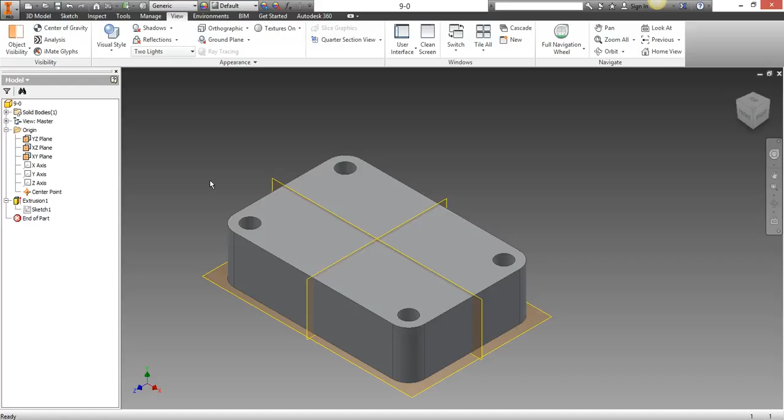To create this shape, go to 3D model and click Start 2D Sketch, then click on the XY plane. I'll show you guys how this sketch looked like before I actually created it. You can either draw this way by doing the top view, or you can hit home and draw your shape in this manner too.

You can see my dimensions: overall width of 2, length of 3. I dimensioned from the center point over 1.5. Same thing from the edge here is going to be 1.

The circles I drew after I did my fillets. I did all my fillets first and made those 0.25. After making all the fillets, I had a center point I could use to select for my circles, and all the circles are 0.25.

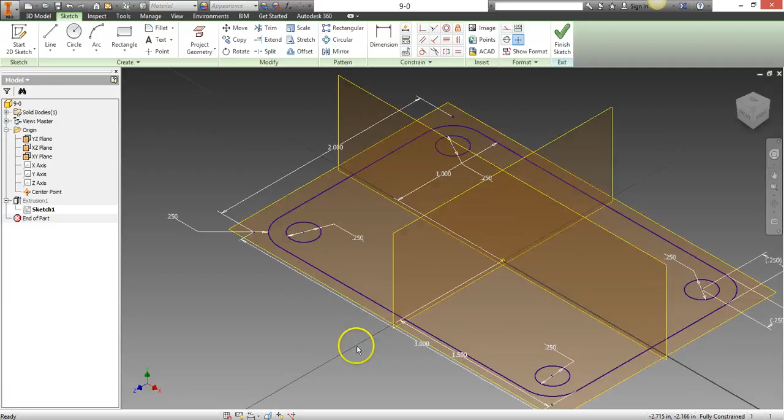Hopefully you guys understand that the distance from the center point to the edge would be 0.25 as well, same thing here. Go ahead and get this drawn and dimensioned, then hit finish. Once you have the shape drawn, hit finish sketch, then you'll be able to extrude.

I'm just going to double click so you can see the extrusion. I went in the first direction and changed that offset distance from my extent up to 0.75, and then I was able to get this shape.

Once you have this shape, we can go ahead and start creating our next shape, which is a little bit different than what we've done. We're first going to go to the View tab and change our visual style to wireframe, which we've done before.

Then what we're going to do is start creating another plane. Right now we've got 3 planes, and we're just going to add a diagonal plane going through this drawing so we can create a sketch on that. I'm going to go back to 3D model and select plane, or I could have right-clicked and selected plane as well.

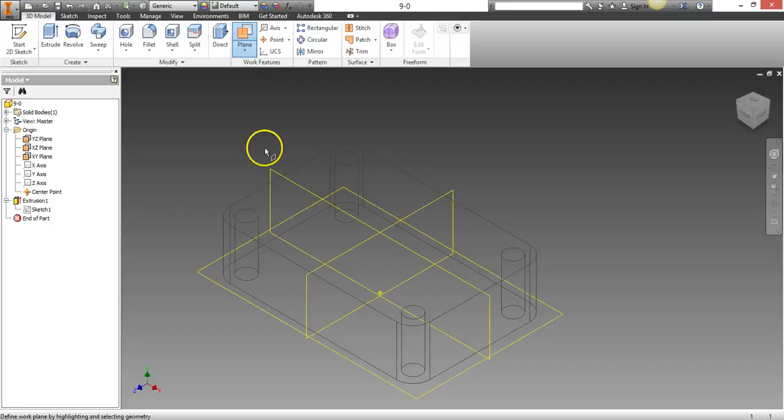I'm not just going to start picking points. What I'm going to do is select over here, although I could do the same thing on the drawing itself. But because it's really expecting me to select some geometry to create a plane from, I'm going to do the XY plane and the Y-axis.

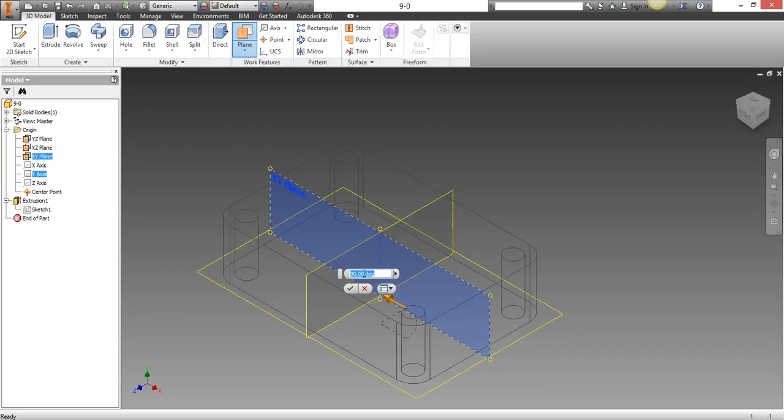Once I do that, I can then type in an angle degree that I want to create this plane about, so I'm going to do 30 degrees. Hit the check mark, and we now have a plane that's going diagonally through our drawing.

Once I have the plane drawn, I can go ahead and do Start 2D Sketch, and can either select the plane here or select the work plane here, and it's going to rotate it for me.

I actually want to go back to the home view, so I'm just going to hit the home button. Then what I'm going to do is something called Project Geometry. I'm going to make sure I'm in the Sketch tab, and then click on Project Geometry.

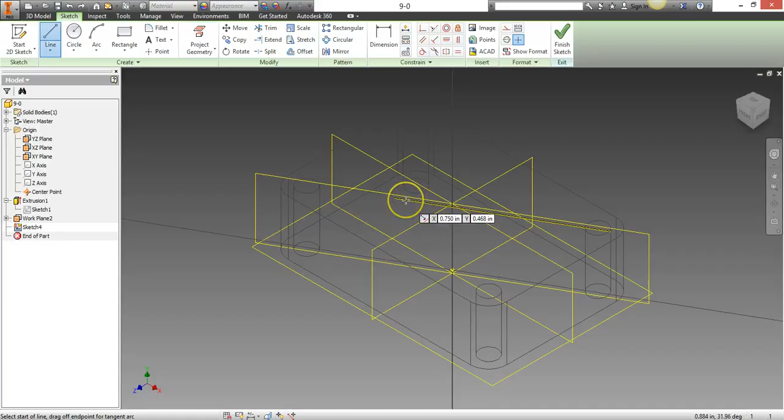I'm going to click the back edge of this shape, and it's actually going to project a line onto this angled surface. Now I'm going to use this line that we just projected and pick a point. Don't pick the end point, or else that's going to constrain it, just pick a point on this line, and that's going to allow us to have a projection point, so we know where this line is actually creating at. It's being projected from this back edge, and it's on the correct plane.

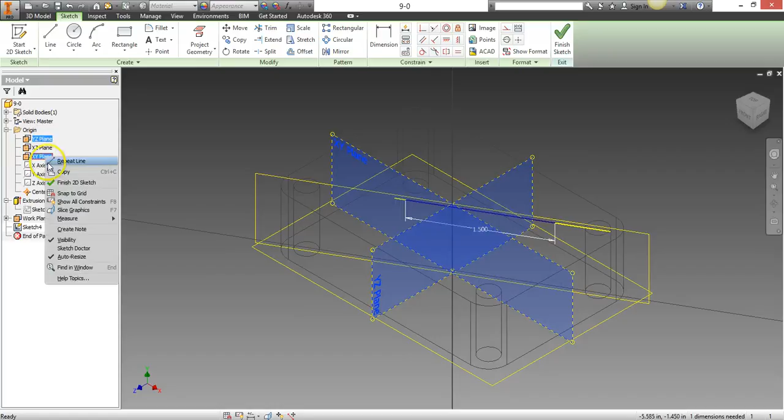So I'm going to make this 1.5. It's kind of confusing with all the planes that we have right now, so why don't we go ahead and hide the XY plane and the YZ plane. I'm just going to Control and select both of those at once and turn off the visibility. That's going to allow us to see this a little bit easier, and we can always turn that back on.

So before you move any further, it's really important to center this line. What I'm going to do is click Dimension and select the endpoint here and the origin here, and then I'm just going to type in 0.75, which is half of 1.5.

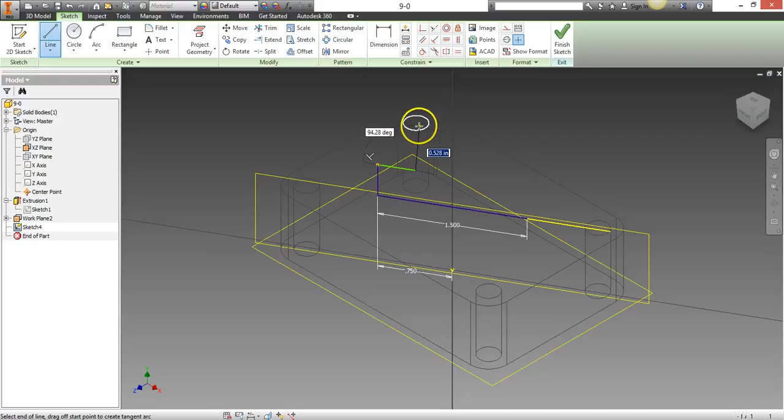Now what I'm going to do is go ahead and create a shape. It doesn't really matter the exact dimensions, but very important, you can do it now, it's saying it's 0 degrees. Make sure that all of your lines are either at 0 or 90 degrees. Very, very important that these are straight.

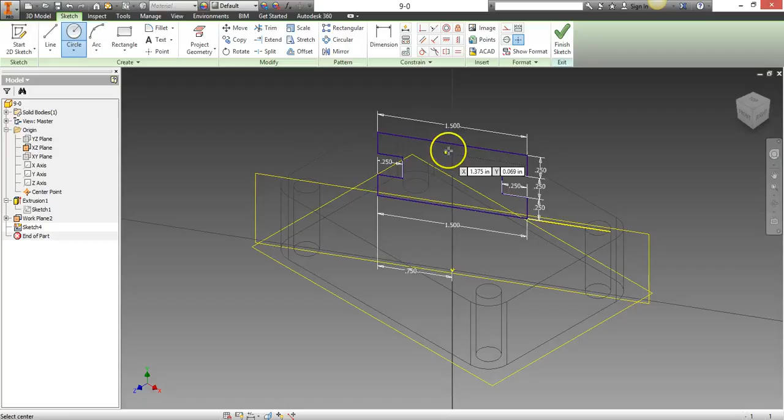I'm going to select circle, make sure it's a center point circle. Actually, let's try to do arc. Instead of 3-point arc, let's do center point arc, and I'm going to select the center, then select an edge, and then I can just move my cursor and select this opposite edge. Now it's going to give me an arc, so there's no trimming involved.

Now I'm going to do a circle. I'll make this circle have a diameter of 0.75, and then I'll need to delete this line right here. I can hit finish sketch. I know that it's not constrained anymore, it's because I deleted that line.

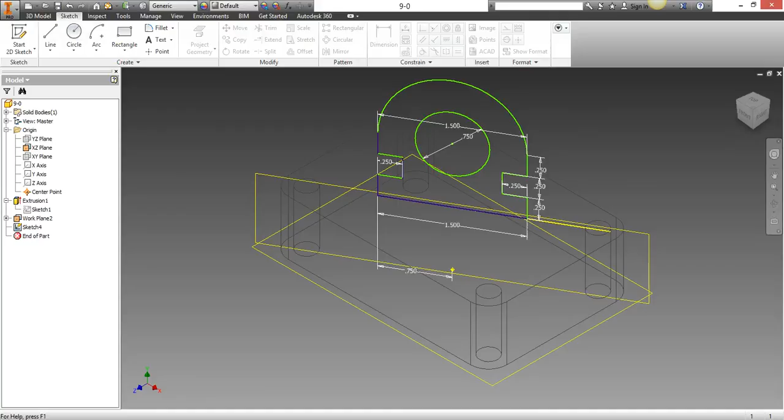But now what I can do after I hit finish the sketch is go ahead and extrude. I'm going to extrude this distance 1, but I'm going to do a symmetrical, so it's extruding 0.5 forward and back. Hit OK. And now we can go ahead and let's turn on these planes again, just in case we need those a little bit later on.

I'm going to turn on the visibility, and I'm going to switch the view now to shaded with edges so you guys can see how this shape really looks. So pretty cool what you guys just did and how we created this shape at an angle because of this work plane that we used.

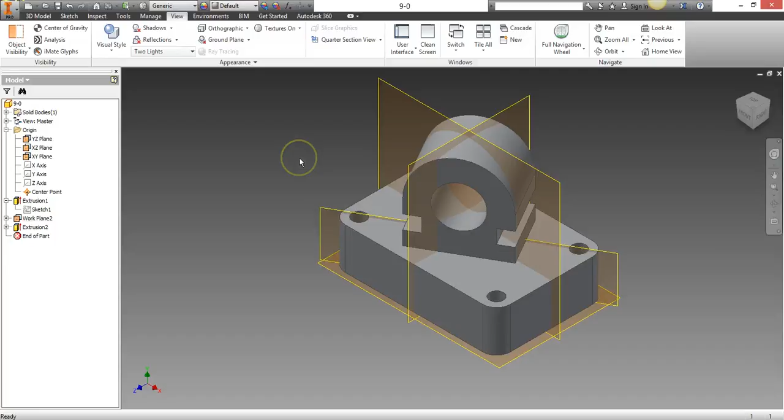So we need to create one more work plane. Just go to 3D model and click on plane, or again right click, and we need to select the top of this view. I'm going to click on this, and don't be alarmed if you see a shape like this. Just make sure that you select the top plane, then click on that plane and just drag up, and then you can let go of your mouse and type in a value.

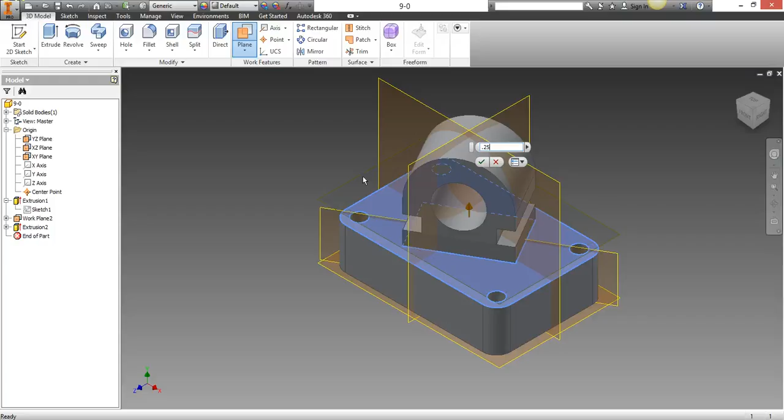0.25. Actually, let's make this a little bit easier for us. We'll do it 0.75.

You hit the check mark, and now we offset up from this plane by 0.75. So now it's actually going to be going through this circle. So I'll start a sketch and click on this plane, or select work plane.

Now I'm going to create a circle, using the center point right here, and I'm going to make this a fairly small circle, 0.25.

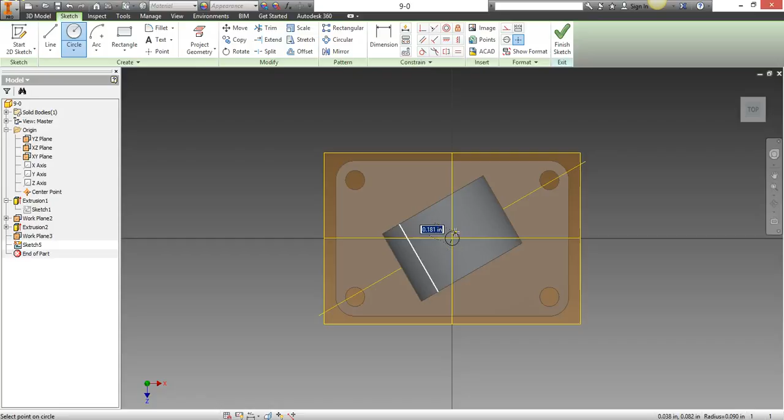We can't see it right now, but I'm going to hit finish sketch, and we can see it just a little bit back here. And I'm going to do an extrusion, select and change it to cut, change the direction too, and then do through all.

So let me make sure this all starts: cut, change the direction, and then through all. Now you hit the check mark, and now our shape is done.

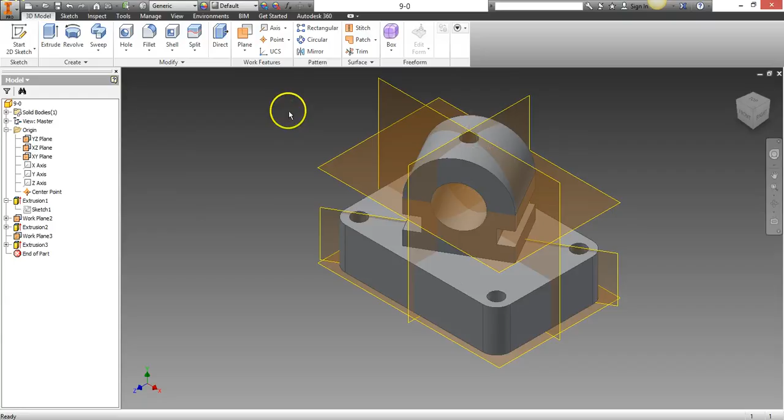So let's go ahead and hide all of this stuff so we can see everything a little bit easier, which is our 3D. And these two planes, if we want to hide those as well, just right click and turn off the visibility for those too. So here's our shape, not too complex, just a little bit different with adding the work planes.

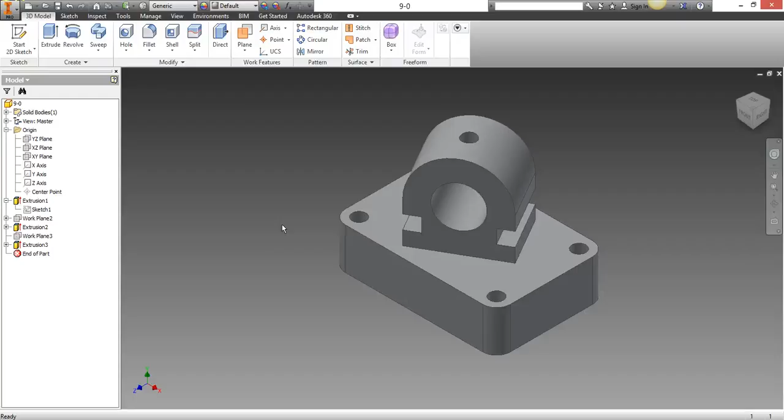Hopefully you can think about maybe when you could have used these in the past, or when you could possibly use them in future drawings if you've looked at those.

So when we're placing this on the sheet, it's going to be a little bit different than what we've done before. You need to be very careful about not skipping these next few directions because you think you know what you're doing. So this is going to be called Rod Guide.

The same settings that you guys have been doing for the sheet are going to be the same. Here's where it's going to be a little bit different: when I hit on base, I don't want to do front.

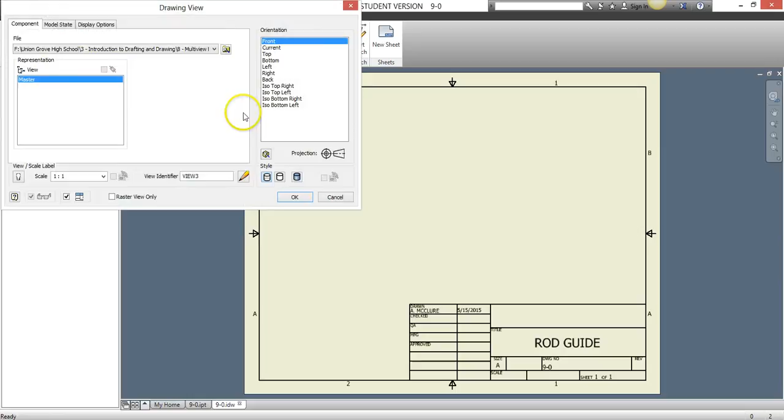I'm going to do top instead, because this is the only view that I'm actually going to use of the 3 views that I typically create for a multi-view drawing. So I'm going to click on that, and it's going to create it automatically for me.

Now I can just hit escape, and then I'm going to select auxiliary. What I'm going to be doing is creating an auxiliary drawing from this shape. So I'm going to select this view so Inventor knows which view I'm using to create the auxiliary view from, and you guys are going to see what that does.

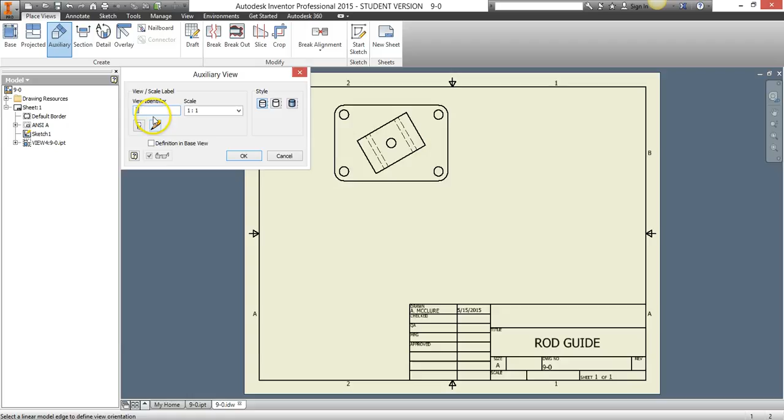So I'm going to name this A, and the scale is going to be 1 to 1. I'm going to click on this face right here and pull this out. This is the only true view that I could have of my shape, so I'll pull this out to right here and create that.

So I might need to possibly move some of my drawings over and adjust this. I'd rather you try not to make this any smaller than 1 to 1.

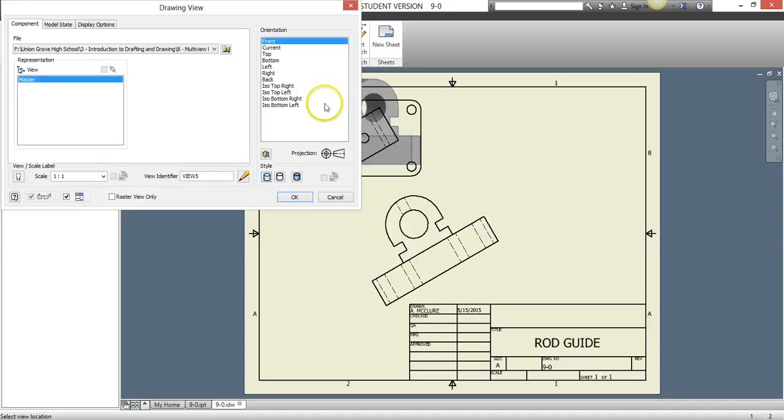I am going to do another base view, so I just did right click. I'm going to do the ISO top, make this shaded, and let's make this 3/4. And I'm going to place this right here, and then I can hit escape.

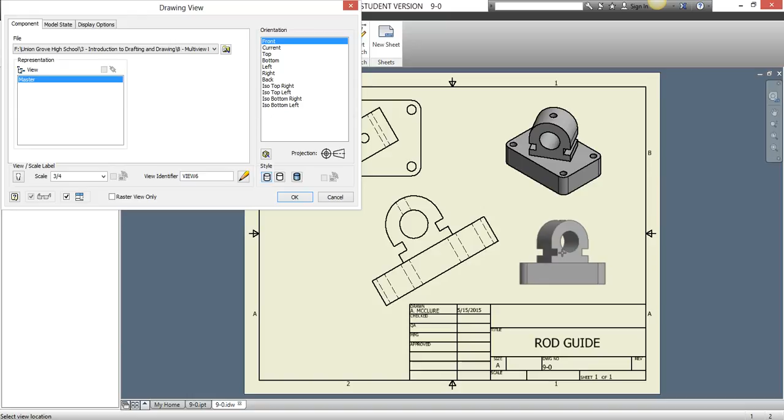I'm not going to add a right side view, and obviously this isn't even a true front view. Let me show you how the front view would look if you guys were curious. So here's our front view, and this is not going to be showing the true face of this object like we see right here.

Here now we've got the top view, the auxiliary view, and the isometric. So go ahead and add center lines and dimensions and then upload this.